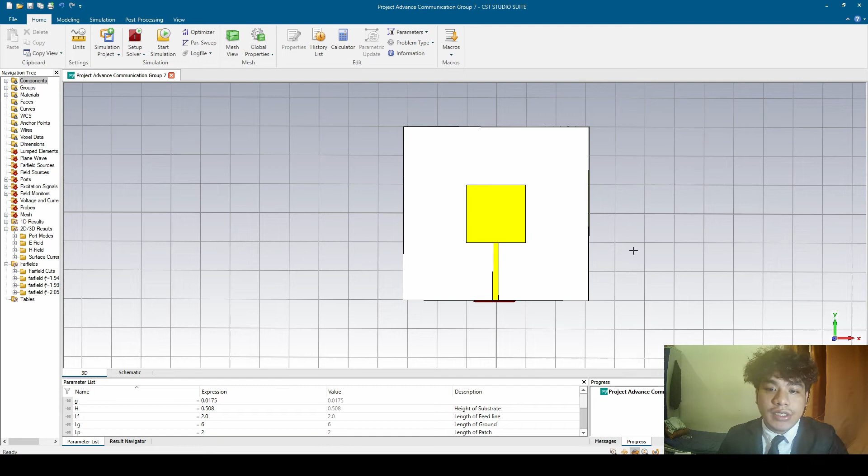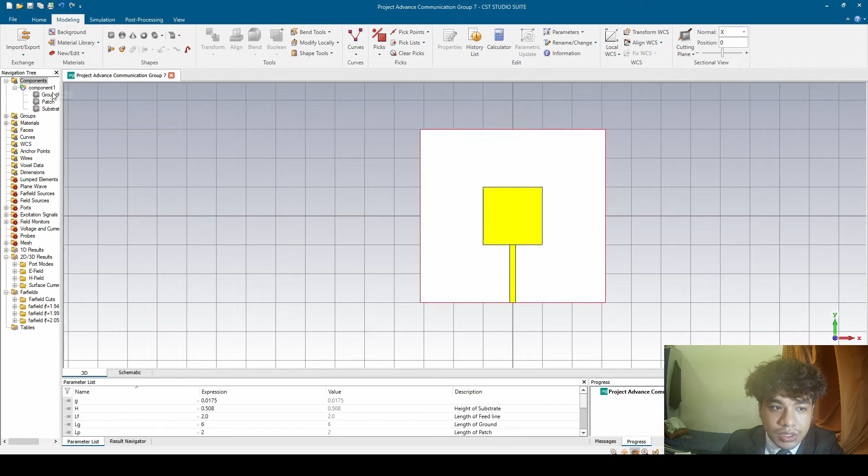As you can see here, this is a design of the millimeter wave microstrip patch antenna in a rectangular shape. This is the front page. For the components of this design, using CST Studio Suite, we have 3 main components, or blocks: the ground plane, patch, and substrate plane. The substrate parameters are in the parameter list written below.

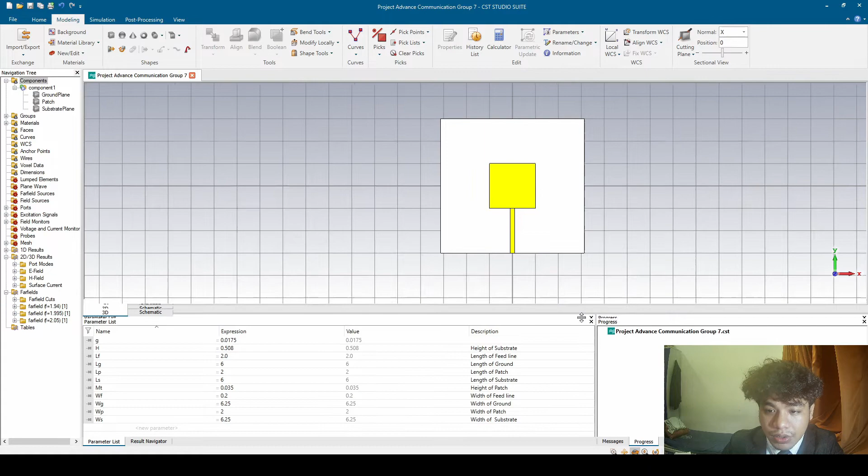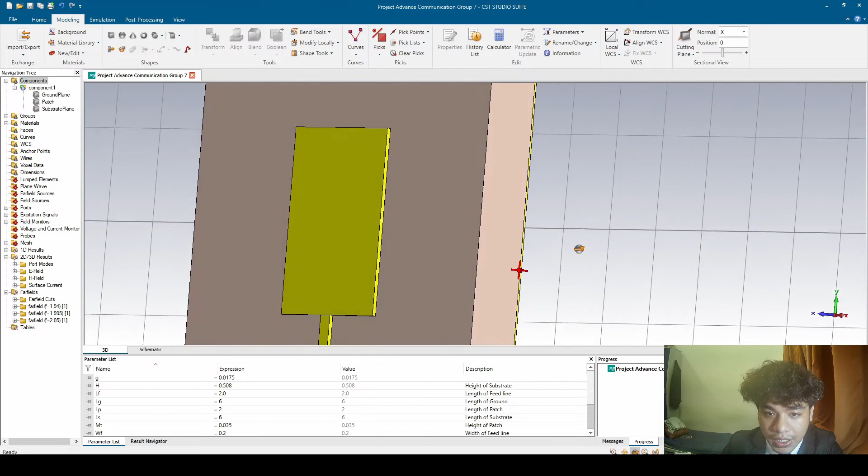So for the methodology, this is the design of the microstrip patch antenna. The yellow one above is the ground, the white is the substrate plane, and the rectangular yellow one that I show here is the patch, along with the lines there.

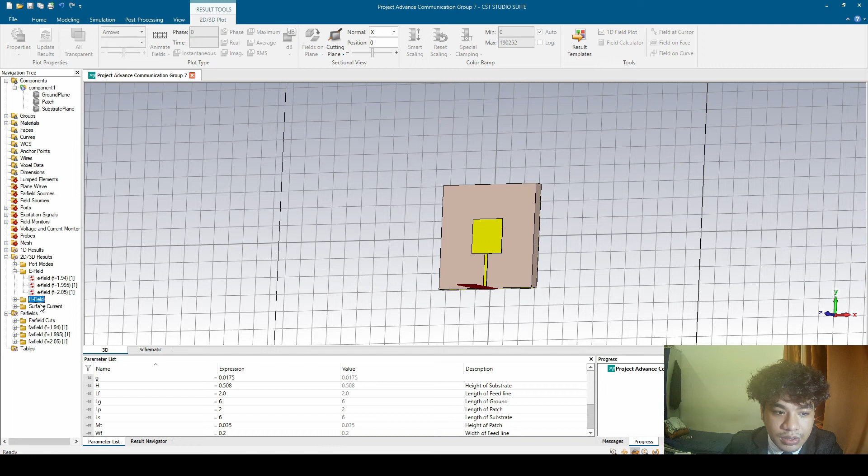For results and discussion, from the design you can see the result for this antenna in terms of the E-field. You can see here the result that I got. This is the far field for 1.94 dBi. You can see it on the surface there.

And you can see the 1D result that I got here for the patch antenna. How will the antenna receive the signals? This is the H-field for the antenna, which you can see on the screen right now.

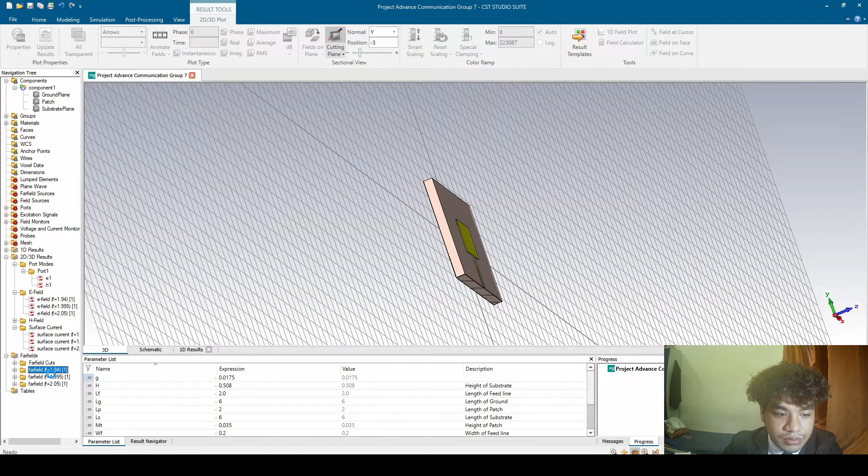However, you can change the view of the antenna results. You can change the view of the far field to 2D or Cartesian. On the Cartesian plane, you can see the far field for 1.94, 1.995 and 2.05. And you see the theta is in sinusoidal form here.

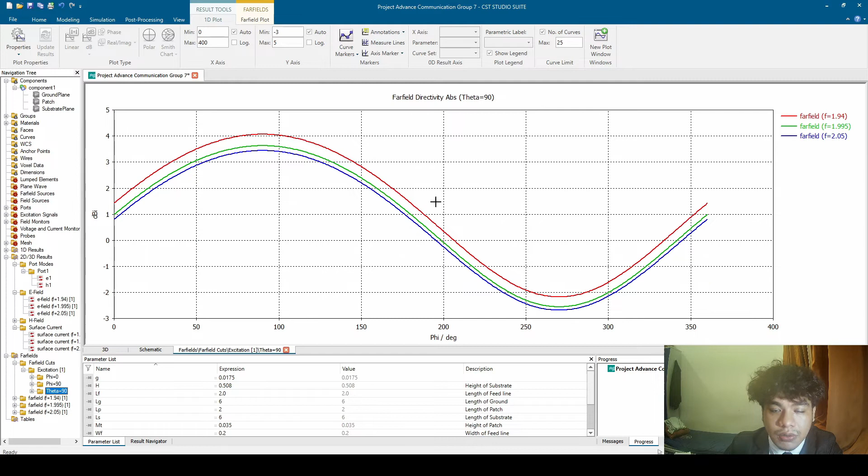On the screen right now, the frequencies I got from this patch antenna are about 1.94 to 2.05 and also 1.995. Below, the frequency I'm showing is 1.94 gigahertz, where the main lobe magnitude is 4.18 dB, the main lobe direction is 101.0 degrees, with the 3 dB angular width

of 110. However, for the far field at 1.995 gigahertz, the main lobe is 3.74. The main lobe direction is 101 degrees, same as 1.94. And the angular width for 1.995 gigahertz is also the same as 1.94 gigahertz. For 2.05 gigahertz, the main lobe magnitude was 3.55. So basically, there is a different main lobe direction and magnitude for each frequency in the design.

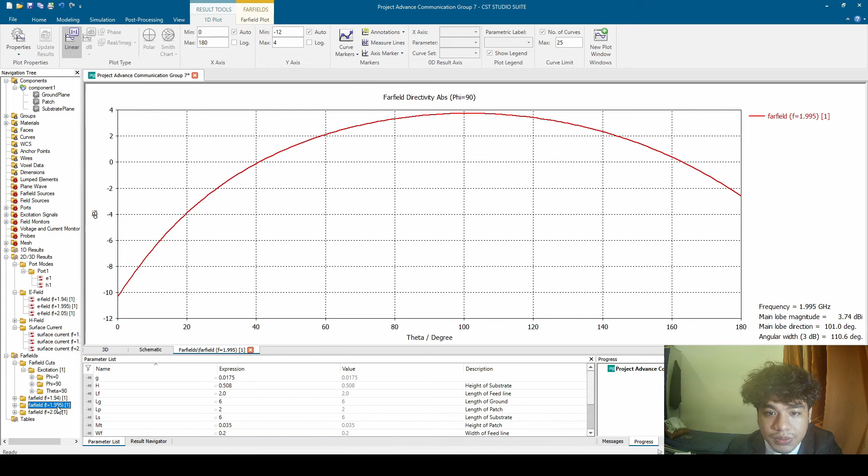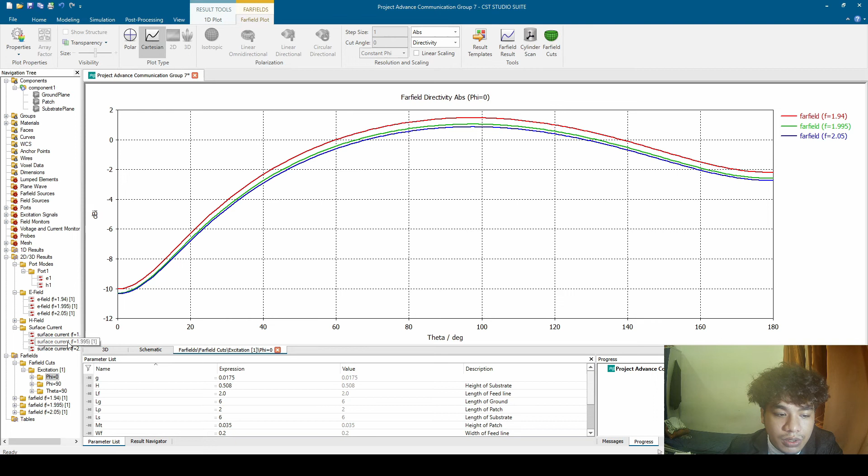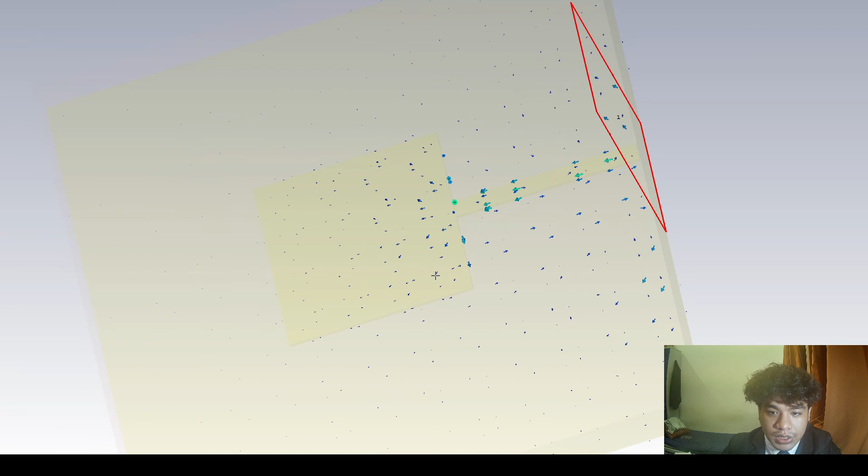If you want to view the far field in 2D, you can see it here on the screen. That's how the design was delivered, with the frequencies there, and in terms of 3D.